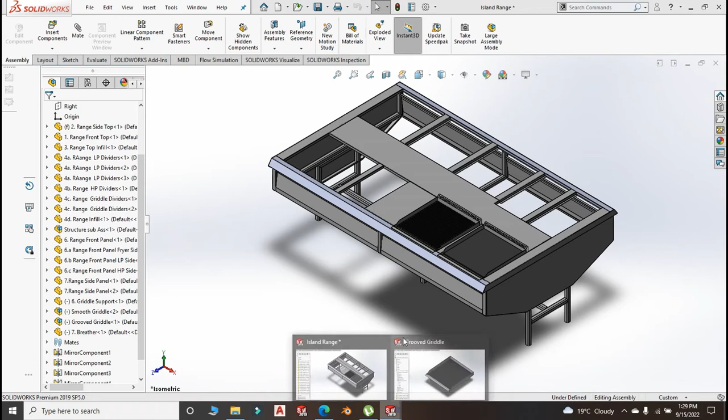Okay, so let us open the grooved griddle. I have it, I think. Yeah, here it is. The burners will be right around here. You will see about it when we start our assembly.

Okay, so without much ado, I will close the range, because I don't need it. Right now, what I will be needing is the griddle. And remember, this griddle, they are of the same size.

Let us remind ourselves the size of the griddle. I think it's about 500 or 499. Yeah, that is 500 by, I think from there to here should be 464. So we are going to make a burner, the length of the burner will be 400.

So you can go to new file and do a new part. Just for a reminder, my custom units are mmgs and everything else. So I will go to the front plane and create new sketch.

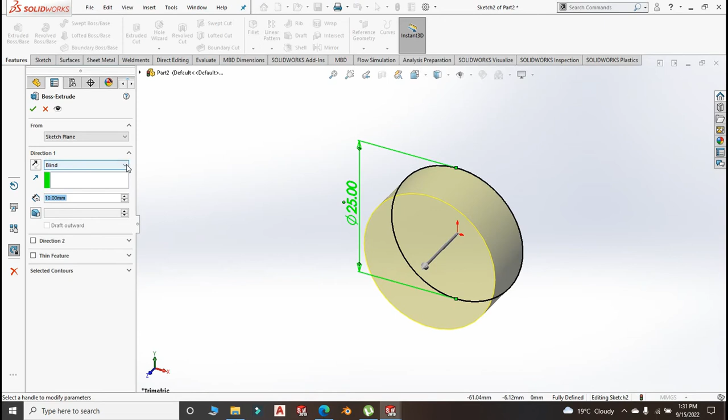I will do a circle from the origin, and the burner will be of dia 25 tube, and like we have said, the length will be 400. So extrude, and extrude it from the mid plane. Length is 400. That's okay.

Now this is a tube, so we will make it hollow, then we will close it. You have to put some end caps there and do full welding, don't want your gas to escape. Thickness is 1.2 millimeter. That's okay.

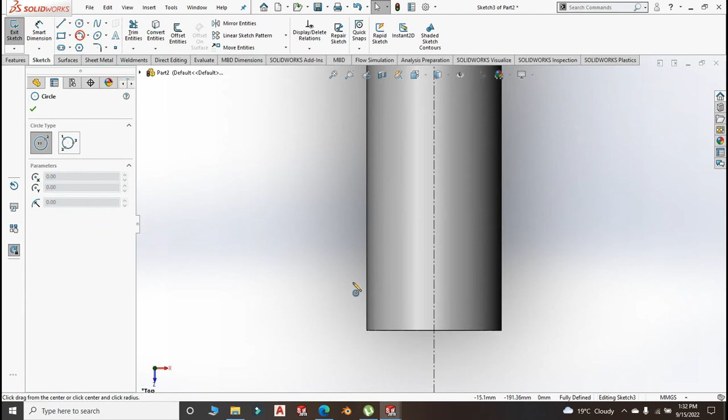Now there we go. Now let us do the holes for the burner. So I chose top plane and started a new sketch. In the new sketch, I do center line from the origin. This will assist us in mirroring our holes. We do a circle.

The diameter of the hole should be as small as possible, so that you need pressure. Remember, these burners are supposed to be high pressure, and this should be 5 millimeter, and from this edge to this should be 5 millimeter. I think that's okay.

Then if I could select this and mirror about the center line. Yeah, I feel like that's okay.

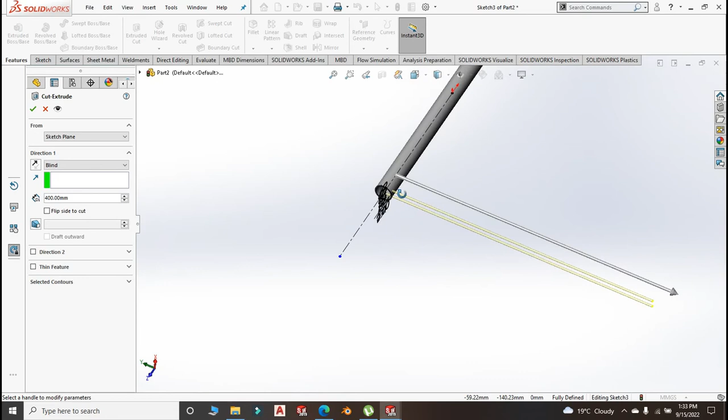Then we go to feature, extruded cut, in the opposite direction. You need to just go up to - is it surface or through hole? Yeah, through all. Through all will do.

Let us look at the orientation. We go to the top plane. Yes, this is okay. You don't want the holes to be - how do I put it - the holes are okay. I don't have the right English to explain that.

Now, if you could go and choose linear pattern and choose the face, and what to be patterned is the extrude cut holes, and you want them to go all the way up to the end of the tube. Yes, those are 40 holes. That's good. That's how your burner will be looking like.

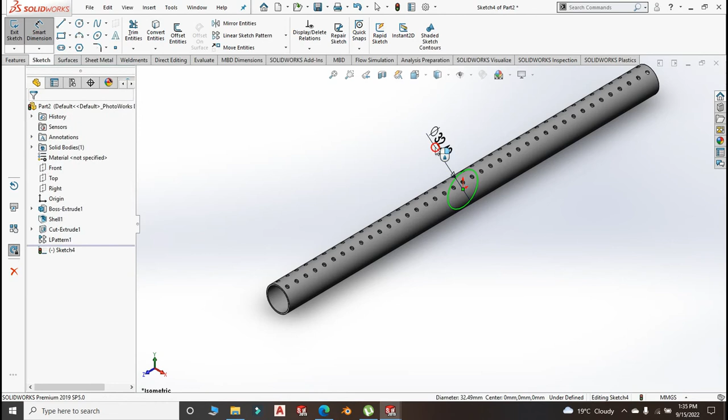This would be like the inlet of this side of the burner, and extrude cut in the opposite direction, you cut through all. Yeah, there you are, you have your hole.

Now if I choose this face here and start a new sketch, then I convert entity. I choose the outer line there, the outer edge, and then I extrude around 1.5 millimeter.

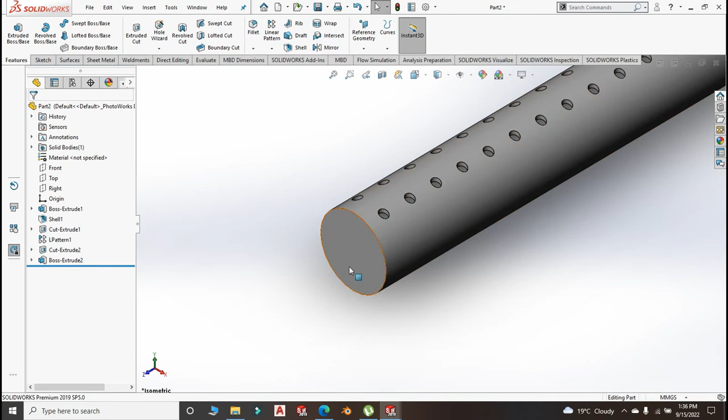Yeah, that's just a cap that we will do full welding, because you need - today my SolidWorks is thinking too much - the gas is supposed to be exiting from the holes only. So this one, you close here and do full welding, no leakage.

So go to front plane and choose mirror, and what you're supposed to mirror is that new extrude boss, so that the other side may also be closed.

Okay, that is good. Now, before I finish with this, let me go to top plane and start a new sketch and hit normal. What I want to do is create a bracket that will be for mounting the burner to the griddle. I choose this line and this edge and make them collinear.

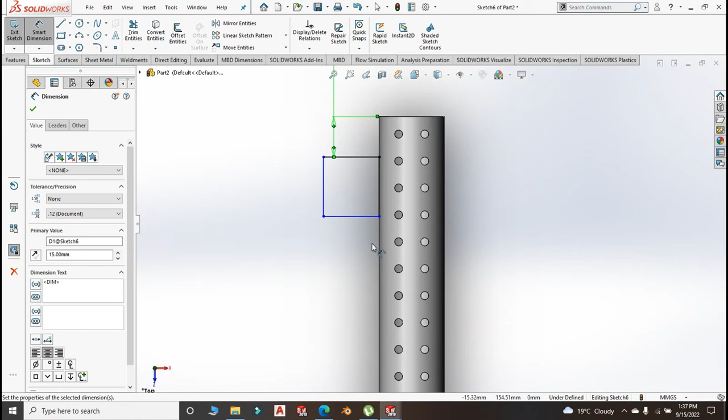Then I smart dimension from here to the outer edge. You can make it 15 or 10 millimeter. There's no harm, just don't take it very far, don't take it too much to the edge. You can do 25, yes, 25 I think will be good. And the size here, you can make it a plate of 30 by 30.

I think that plate is okay. Now create a circle, and this should be, because we are going to use roofing bolt M10, so you can create a bolt hole of 11 millimeter and it should be at the center of the plate. This should be 15 mil, and from here to here should be 15. That's about that.

Now let us mirror that to the other side. Create center line. Well, you can finish with that, or you can mirror it at this point. So choose all that and mirror about the center line. There you go.

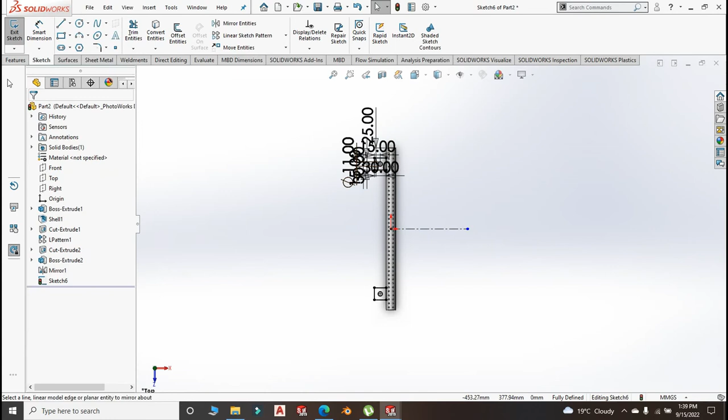Then go to feature and extrude. Here extrude through the mid plane and make it, use a plate of 3mm. 3mm would be good. That's good. That's how our burner is starting to take shape.

That's okay. Now remember, this will be an H burner, so we want to create this part that will be joining the long burners. Okay, so let us go to new part.

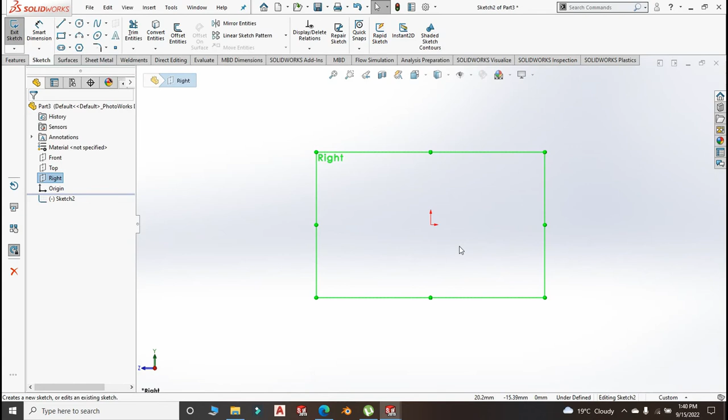Then we go for the right plane. Don't know what is not happening, this thing of mine keeps misbehaving. So create a circle at the center, same dimension, that is 25mm.

And between this and this should be, let us first make these circles concentric. Looks like I didn't choose the center when I was doing the other one. I didn't choose the origin, but now they are good. This is 1.2.

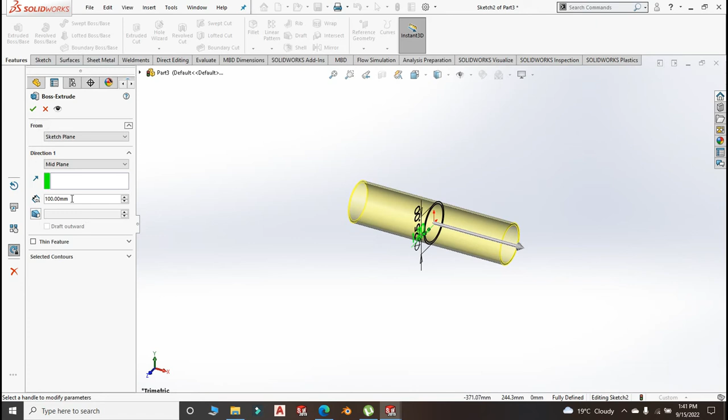Yes, that's okay. I keep telling you there are different ways of doing the same thing. Like the first one, I extruded blind and I did some shelling. This time round I have just decided to make a pipe out of it. The size is 100mm. I hope you have seen that.

Don't get carried away by my too much talking. Go for the front plane and start a new sketch. Make it normal. We want to notch this pipe. I hope you know how, when you intend to join pipes, how to do the notching. Okay, so actually we can do both sides instead of mirroring. That should be okay. See, they are from the center of the tube.

Then extrude and cut, cut through both. That's our pipe, it has been notched. So when we will join it to the other pipe, it will fit correctly and the welding will be good.

There will be no leakage. Go to the top and create a new sketch. Did we choose new sketch? Top sketch. What's not happening here? Top plane, new sketch. Yeah, we are at new sketch. Make it normal. Here you want to create the holes.

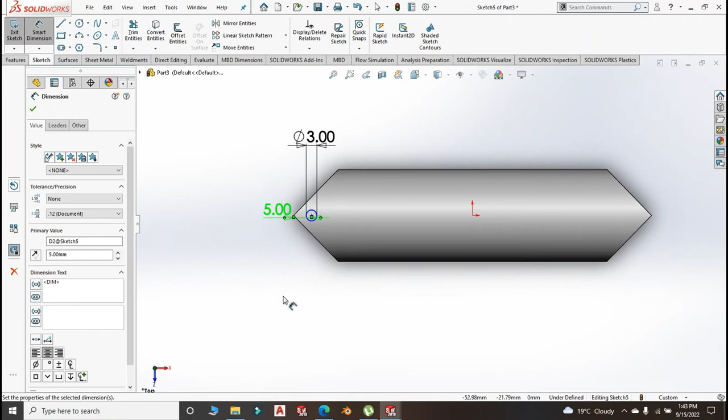Same size, 3mm, and from here to here you can make it 5mm. Yeah, that's okay. Then choose the center and the origin, make them have a horizontal relationship.

I don't know what's going on with my... I think it's the mouse. Extrude the cut and cut just one side, the opposite, at the top there.

That's good. Then you linear pattern, choose that face to be patterned. Should be that hole that you've made there, and this should be about 10 of them, but I think actually you can do 5.

You don't need to do that spacing. This spacing is, yeah, 20 mil is good. The purpose of this is to spread the fire from one burner to the other one. Is that correct English? I think that should be it.

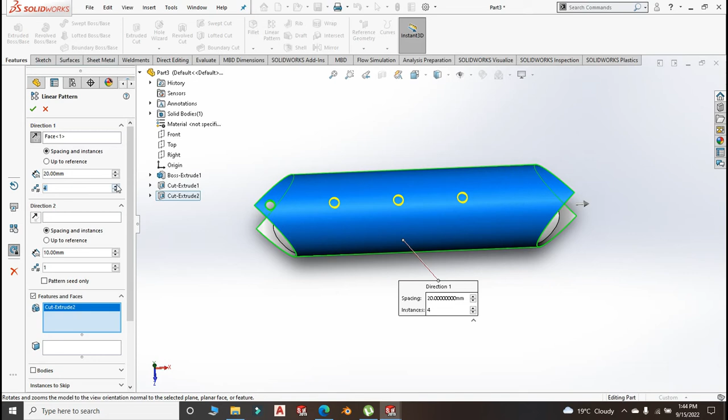You don't put so many holes here, you just need a few. So 5 holes are good. That's okay.

Now go back to top plane again and start a new sketch. From the origin, create a circle, diameter 10 millimeter, just like the other one. This is 10 mil, and extrude a cut on the lower part.

Feature, extruded cut, yes, like that. That's good. The hole is there. The hole is there. So this is good.

Go ahead and save it as short burner tube. Part number 2, short burner tube. You don't have to write tube. Anyway, you know better. Go to new file and create part.

Yes, we need to do what? To go for the right plane and create sketch. New sketch. It's not coming. Right sketch. Good. Now select line from the origin there, like this, like this. Okay, smart dimension, make this 30 or 35.

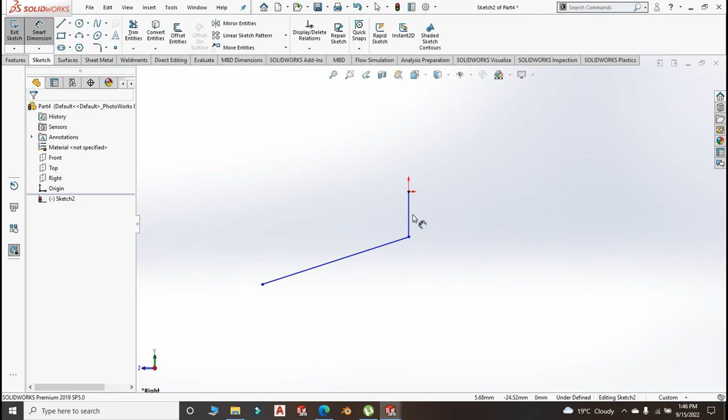35, and this make it 250. The degree here can make it right around 100 degrees. That is okay. Now fillet this and fillet it to 12.5. Actually this should be more of an elbow, or if you have a tube and you can bend it with these parameters, then you are good.

Sketch 1, exit sketch. How do I exit sketch?

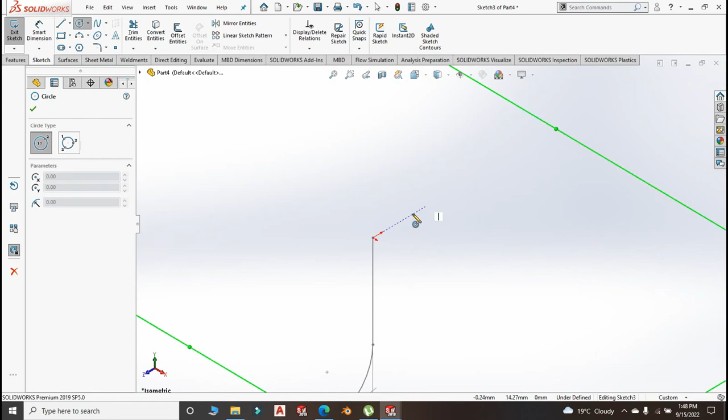Create a circle, the center that is from the origin, and the diameter of the circle is 25, because we want to sweep this on the first sketch.

Still, it's not giving me the option of exiting. What happened to that menu of exiting sketch?

I don't know. Feature, go to sweep, and the sweep profile is sketch number 2, and the circular profile, there you go. Yes, now we have our burner.

Come in, shell this 1.2 millimeter, and choose this face and choose this face because you want it very hollow. There you go.

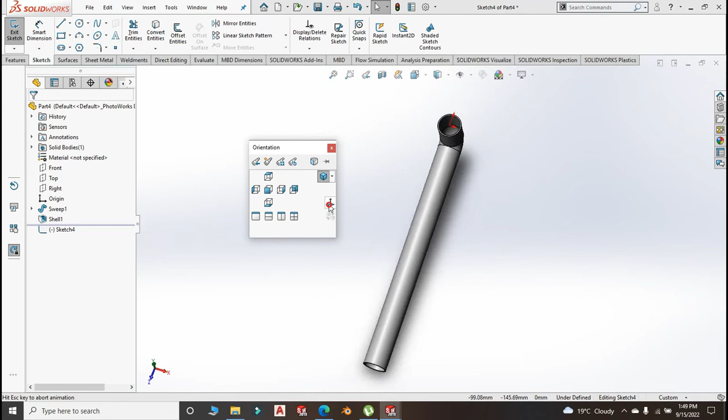Now go to top plane and start a new sketch. Yes, make it normal. We want to create a rectangle,

A slot here, like that, for the purposes of setting the aeration gap. What am I saying? Am I making any sense? We are trying to dimension from here to here.

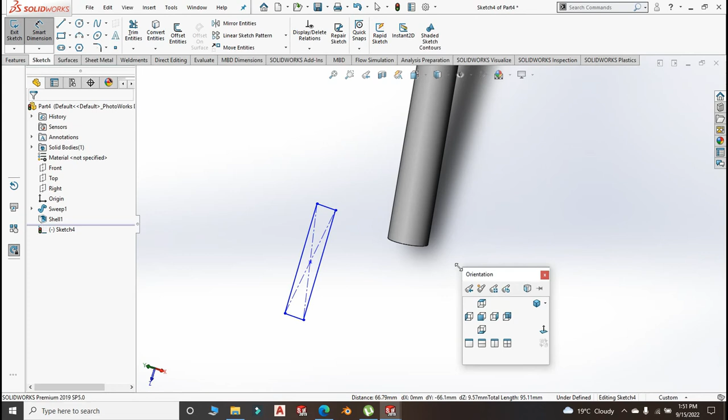I want to start smart dimension from... okay, let me create a center line.

Fine, that relationship is good, so I want to smart dimension from this to this. Make it 20 mil is good.

And you shouldn't have done that, eh? Yeah, that's good. Then this, I'll make it 12.5. Let's see. Yeah, that's what I wanted.

Now I will go to feature and extruded cut, and this I will choose up to next. Yes, because I just want to cut that one. Before I do that, let me continue with the sketch first and create

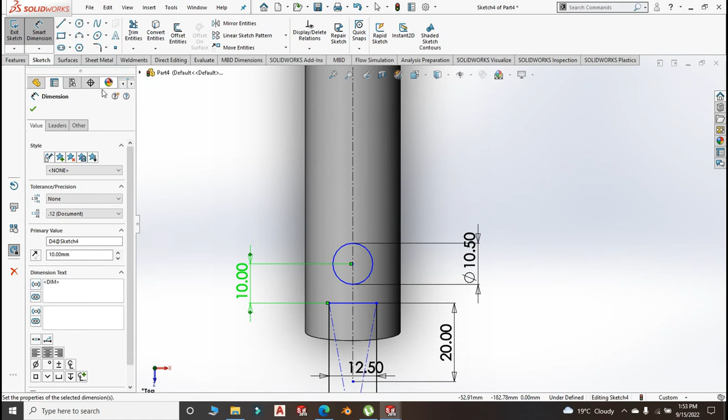From the center of the circle, it can be around 10 millimeter. This is for the bolt that will be for the adjusting that. And how do I explain these things? You hold on, you're going to see.

Up to next, or up to surface. Is it up to surface or up to next? Up to next. Yes, that's good. Our burner is taking shape.

So this part, okay, we go to right plane again and create new sketch. Normal, create a circle. We want to notch also this part. That's about that. Extrude a cut through both. Click OK.

Go ahead and save this part as part number 3. Sorry, 3. I don't know. We will call it what? We'll call it the inclined tube.

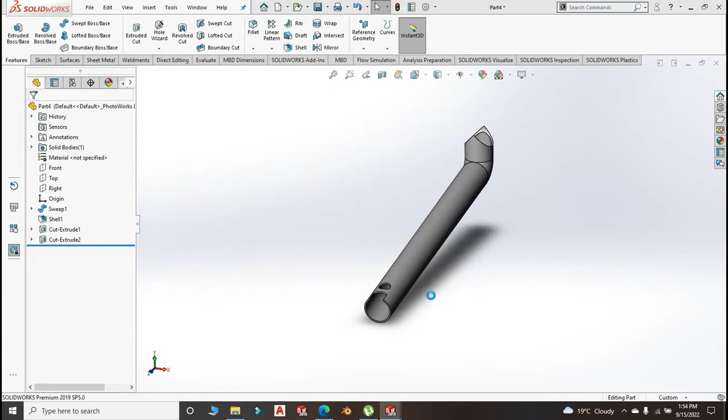Now we need to create a small piece of tube that will go inside this tube. That tube is the one which will be controlling this gap for the purposes of aeration.

You remember the cooking gas, what is the name of this liquid, you know, cooking gas? What do you normally call it? The LPG gas, right? Yeah, the LPG gas has, for combustion purposes, it has to mix with oxygen, right? But you have to control the oxygen for the purposes of having the best flame.

This, just like we were doing it in our O level secondary school, or I don't know how you call it there, wherever you are watching from. The Bunsen burner. The first lesson we learned in our lab was about the Bunsen burner and how to ensure you are having the correct flame, the bluish flame. And there was a hole there, where you were adjusting, you know, the aeration. That is the same case here.

So let us create another part here, just a small tube of dia 20. Remember, this is dia 25. This will be dia 20.

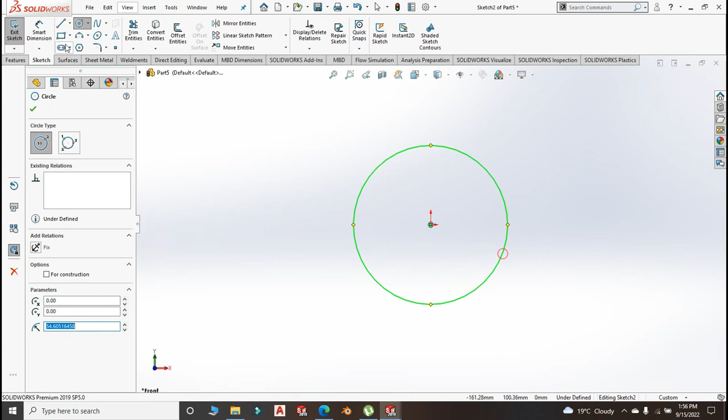Extrude mid plane, the size of it should be 20 or even 30. You can do that, even 15, there is no harm, right? You don't want it to be too long or too short.

Shell this 1.2 millimeter through hole. Yes, you know, this is not for blocking the gas, it is for the purposes of regulating the air.

Reference geometry here, and I create plane, and this plane it should be 10 millimeter on from the origin. Then from that plane I'll create new sketch.

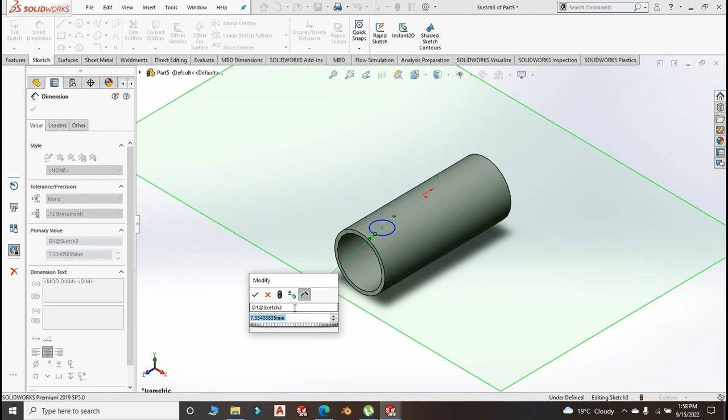All I want to do is create a small handle and a stopper for the tube, so that it might not be getting lost in there in that tube. And you know, you can weld a small rod of 8 millimeter and very close to the edge, to the outer edge.

Like this. They are saying it's 6mm. You can do it like 2mm from the edge. It shouldn't be 2 because the dia of this thing is 8mm. 8 plus 2, so 10 will be good.

Is it? What is the diameter? 8. 2mm is good. So extrude feature.

And the size should not be too big, like 30. Just for the purposes of having a handle. Even 20 would be good. Yes, like that.

Hide this. Save this part as part number 4. Now what are we going to call it? We are going to call it... Dia 20 tube, I have lacked a better name. You will see it when we start doing our assembly. Now at this point we are going to create jet.

Back. Is it jet, flare nut, jet, and something like that? I wish I could just watch.

So we create new part. Okay, and the first thing here we will create is the front plane. Start a new sketch there.

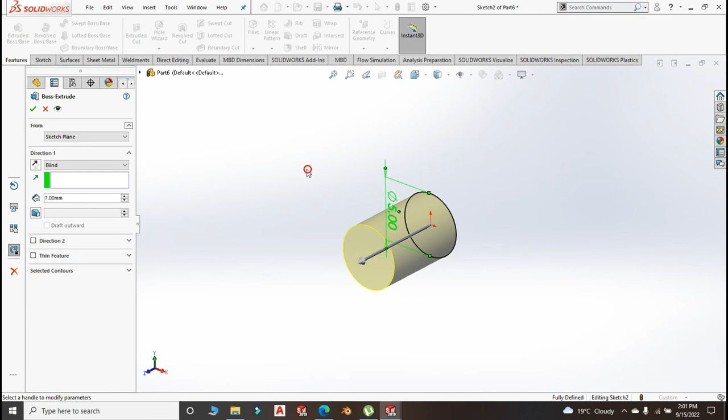Create a circle of diameter, this should be a solid of 5mm dia. Extrude, feature extrude, one direction. This is about 7mm, to create that nozzle. And jet, select this face.

Okay, this is something that you can buy, they are imported, right? I just want to show a representation of how it looks like, so you don't have to worry about it. It's just a representation, it might not be very accurate. This can be of dia 8mm, 7mm is okay, it's just a representation, so let it not worry you very much.

And this can be 4mm. Yeah, from there we create new sketch.

Normal. Choose the polygon, origin. That's okay. This, make it vertical. Choose this to this, make it 12, and extrude by 5mm.

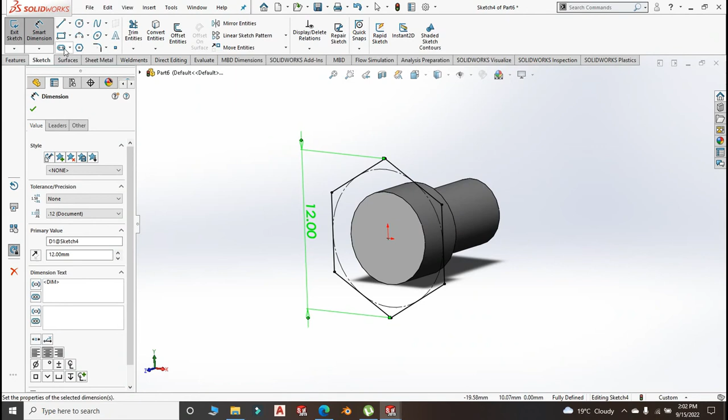It's also good for your practice, and for those guys who are very new, 4mm is still okay. In SolidWorks, it's good when you are doing some of these things for practice purposes.

Now I want to create a very small pinhole. Do you call it a pinhole? A small hole, because you need the gas to be at high pressure, and you need a very tiny hole like this. It might look big from the sketch, but a 3mm hole is very small. So extrude cut, and cut through all.

And remember, this part is very airtight, it should have no leakage whatsoever. So I'm going to select this face and create the washer nut that will be welded to the tube. Our tube is diameter 25, so this can be 35 millimeter, 35 millimeter.

That mil would be good. 30 mil, and extrude it. This 2 millimeter is okay.

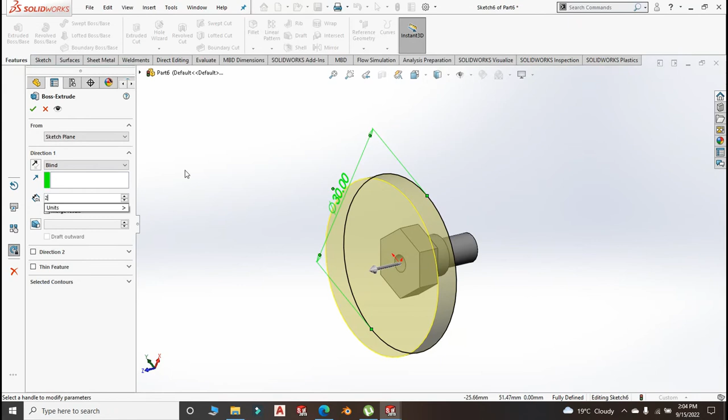Then select this face, start new sketch, another back nut, select polygon from the origin. That's okay. Create normal, make this horizontal, is it horizontal or vertical? Then choose from here to here, you make it 12 millimeter again.

Yeah, I think it's same size as the other one, and extrude these 3 millimeter. Is it 3 or 4? 5. Yeah.

The purpose of this is because here now we have the female, is it the female or the male part of the flare nut? So here we create circle.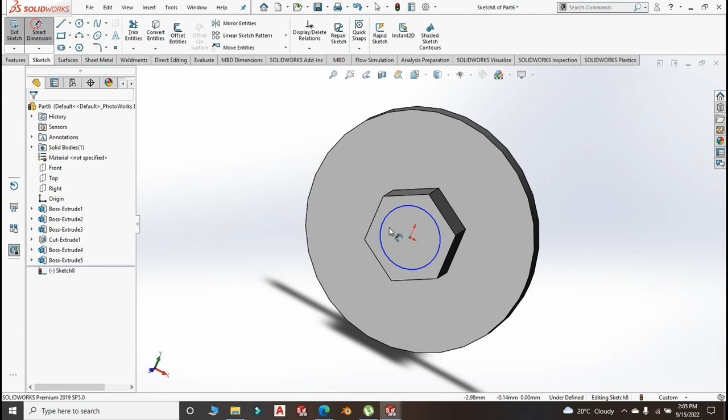The diameter of this circle should be around 8 millimeter. Then we extrude it 10 mil. That's okay.

Create a chamfer. This should be 2 millimeter and 45 degree. You choose this edge. That's okay.

Now remember our pinhole is going up to the washer, so we create a circle from the washer, and well, I don't know, you can make this a little bit bigger, there is no problem. Big is like 5 millimeter.

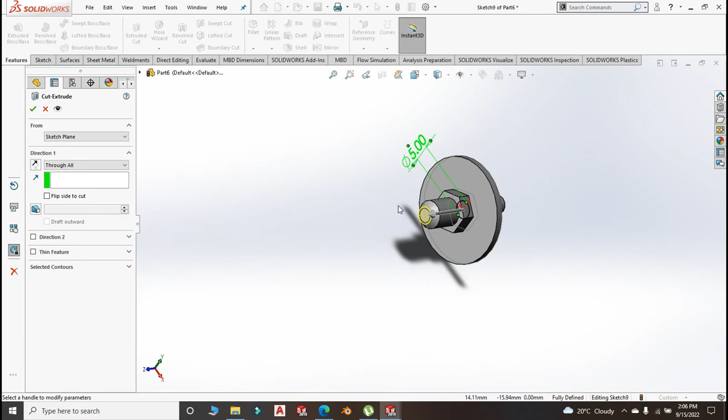Then extrude the cut through hole. I don't know, that diameter is big. No, it's good. Yeah, so our hole is going through.

Now I don't know whether the others I was choosing material. This is always copper, metal, copper. What kind of copper? Polished copper, brushed copper. Yeah, it's always copper.

Now go to hole wizard. Where is hole wizard? And choose thread, and your thread will be starting from here.

Yes, if you want to offset, you can offset by 1 millimeter. No, don't offset. And your hole up to here, and it's metric die. Is it metric die or metric tap? Metric die, and you choose M10 by 1 or M10 by 1.5.

I don't know about threads very much. Like I was telling you, these are things that I don't worry about myself. Yeah, I should have offset the other one so it may have a better finish. Can I offset it by 5? Yes.

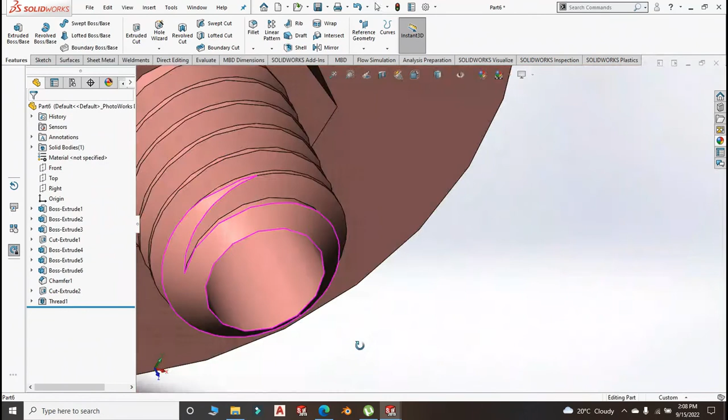Yes, see, the threads are good. The threads are better there. So for the purposes of making it better, I choose this face, start a new sketch, then convert entities and choose the face. Has the entity been converted? I hope so. Then extrude.

Yes. And this I will cut through all. And the end of the thread will be good. So this part is the one which you normally connect to the flare nuts and all that. The gas people know better.

So that is that. Save it as nozzle and jet, part number 5. Nozzle and jet.

Yes, can we start our assembly and see how our burner will look like? File a new assembly. Click OK. And the first part is burner. Actually, can we bring everything, because we will be requiring everything apart from the griddle.

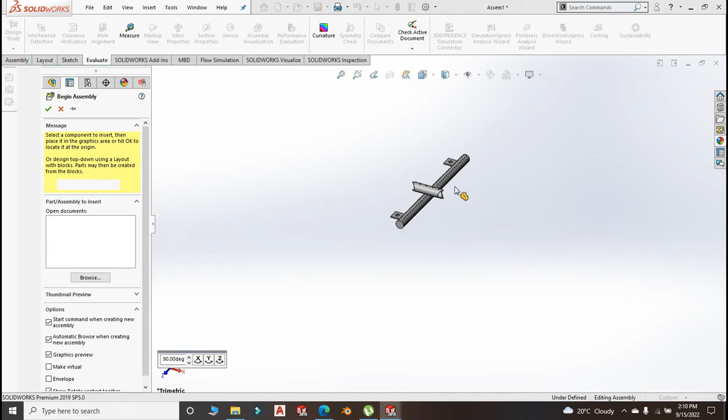Yeah, so that is 1, 2, 3, 4, 5. Okay.

Now we want to do our assembly, and unfortunately I will be having the same issues I was having last time. If I choose that plane and this plane for the short one and make them coincident, then I will choose mate again. I will choose this, make it tangent to this.

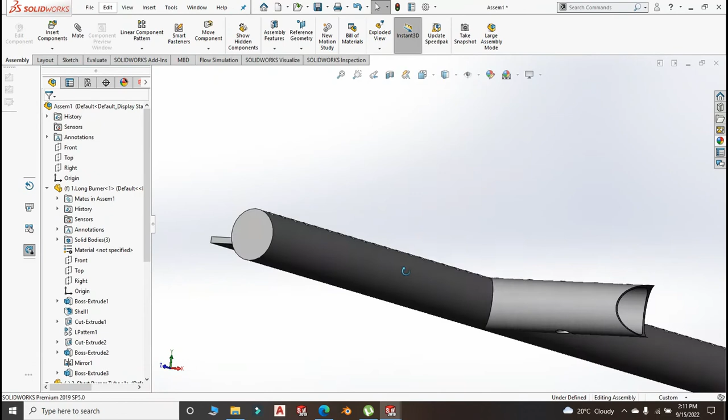Okay, now see here, you will do your full welding. Remember the hole that is there, like I was telling you, gas will be coming from the pinhole here, through this tube, through this hole, then it can go to this side or the other side. When we mirror this, we will see. Yeah, so that is that.

Now I'll choose again to mate, and I will take which plane? Yes, this right plane, and I will choose the inclined tube right plane. Yes, then I will mate again. I don't know whether this will work. Tangent this and this.

When I choose top plane and mate with the top plane of the inclined tube. No. That I shouldn't have done.

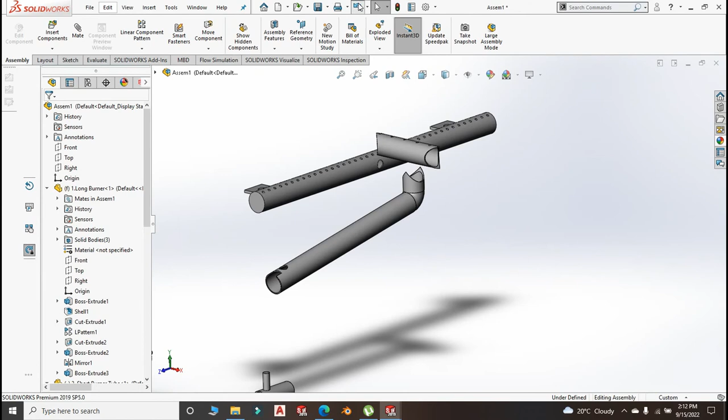Before I go to that, let me choose this top plane of the long burner. Yes, and to make them coincident, I mate with...

Is this floating or fixed? It is fixed. So I don't know. Yeah, now looks like it is good. It is fixed, it is not moving.

Let me see if I mate the top plane and this other top plane also, whether it will do me right. That top plane and top plane of this, it's not coming. So there is something I need to delete there or edit, and go to the mates and edit something.

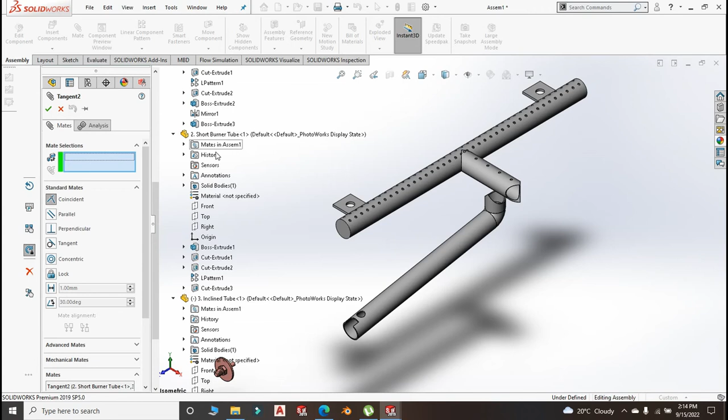And make coincident. Therefore I take this top plane and the top plane of this. Yeah, now that is better. Then I will choose not the right plane but the front plane and mate it to the front plane of the small burner. That is front plane of inclined, front plane of the small burner. Yes. Now the burner is looking good.

There is where you're doing your welding and all that. Now I will take this insert, not mate, and make these two concentric, this and this. Concentric relationship. Like I was telling you, this tube...

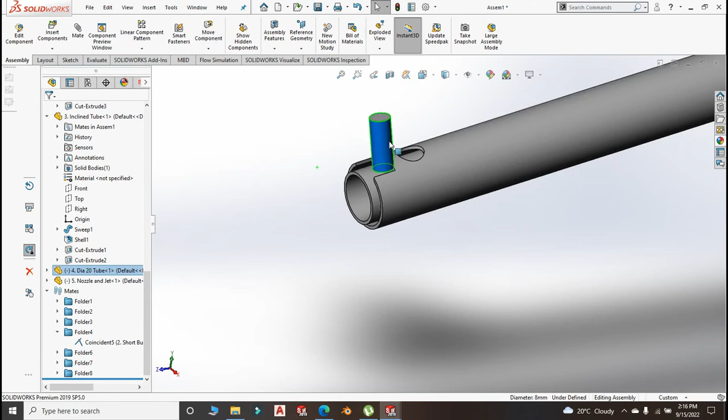We are going to edit this. You want... okay, let me open this and add. I think I don't need this extruded boss. It is not necessary, so let us delete. Follow also the sketch and delete.

Well, these people, they normally know how to do it, you know. Assembly, sub-assembly.

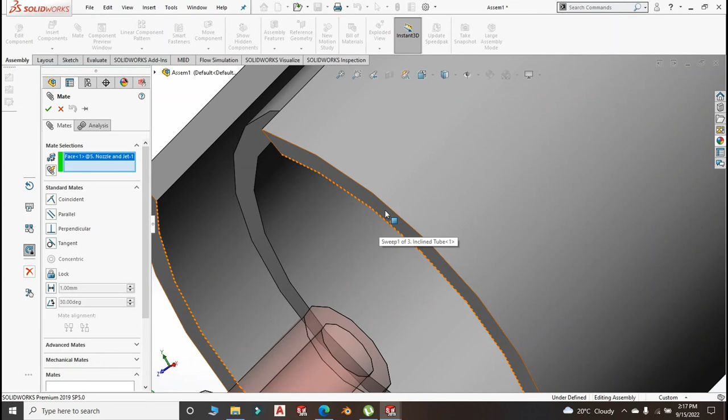Yeah, like I was saying, this tube goes in there, and that is what you use to regulate this hole here, the kind of amount of oxygen that you will be allowing to mix with the combustion, the cooking gas. Now we mate this to make them concentric relationship, this concentric to this. That's good. Then you mate it again, and of course this face will be welded, tack welded to this face here. That's good.

Now what will you see if this tube touches the washer, the amount of oxygen that will be going inside the tube is very small when you look at the space that is here. So what I was saying is, you adjust it, you open this opening or close it depending on the flame.

This is normally done as your burner is on, observe how the flame is behaving. And if you're satisfied, there is a bolt, you weld a nut on this hole and a bolt, so you tighten the bolt which tightens this inner tube in its place.

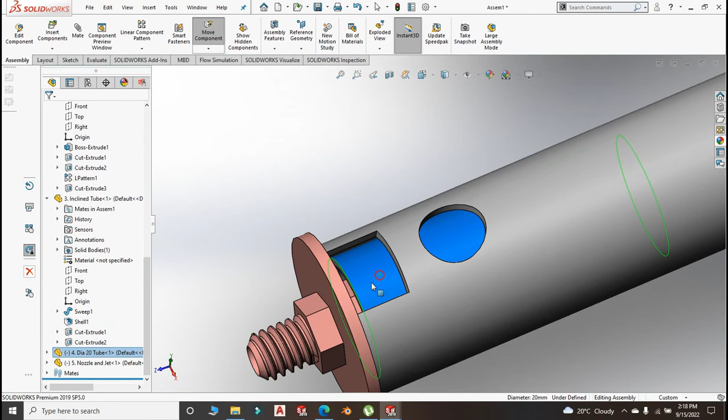We've done some little observation of how they do their gases, their gas fittings.

I'm going for the inclined tube and choosing the right plane, and I will mirror components. Is there anything else that I have not inserted? I think we are good, and the component to be mirrored is this long burner.

No, it shouldn't be like that. It should be like that, but no, I don't like that, because now the holes are on the other side. I don't know why it flipped. It shouldn't have flipped. Now they will be forcing me to insert another burner. Oh man, long burner.

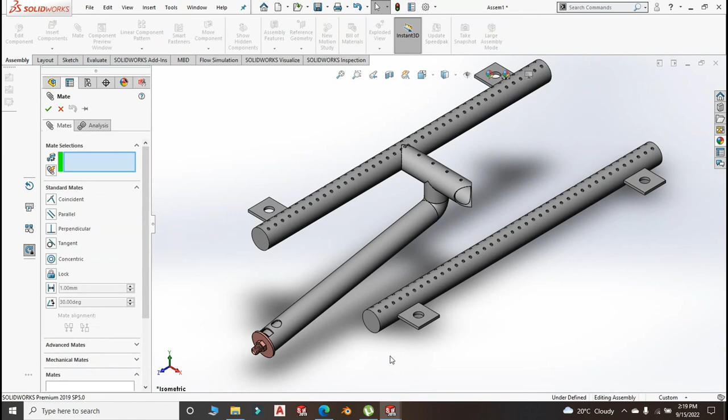Then what do I do? I rotate it, okay. No worry, mate. We are going to take this and this. They're flush? Yes. Then again mate, this and this. Alright. Then I don't know, mate.

Now this will give us some trouble. Tangent. This to this. Perfect. Yes. Our burner should look like that. Our H burner should look like that.

And like I was telling you, we will require two. Do I need to do a bolt and nut? There, yes. Let us do a very quick bolt and nut. Now save this as burner. Griddle burner. That's so cool.

Go to file, new, and we create part. Click OK. Go to the top. Start a new sketch from the top plane. Center. No, I should choose the polygon.

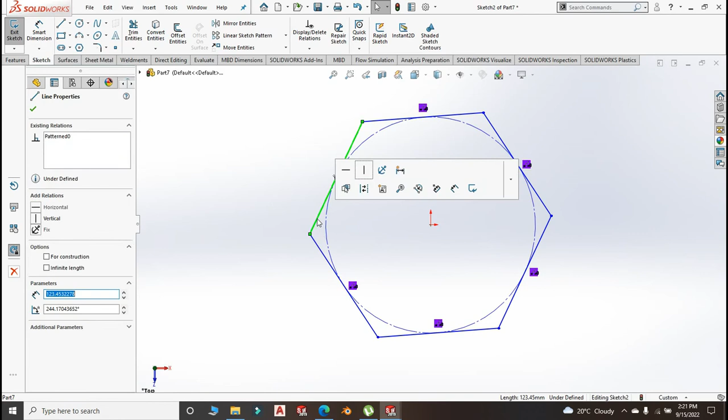We are doing the bolt, then we'll do the nut. Make it vertical. The diameter from here to here, we are using a bolt of 10, so this should be 14, right? I don't have a bolt here that I can take the actual measurements from, like I was telling you, I just want to know how to draw it and do some correct representation.

Otherwise, we later will be doing bolts and nuts, the actual drawing of a bolt and a nut. No, the extruded boss, we edit and make it in the mid plane. Yeah, mid plane. Yeah, that's good.

And we choose this face here and start a new sketch, circle from the origin, and we select the circle and this edge here and make it a tangent relationship. Then we will extrude cut, and here we will choose flip side to cut, degree of 45, and end condition will keep through all, right? I think that is okay.

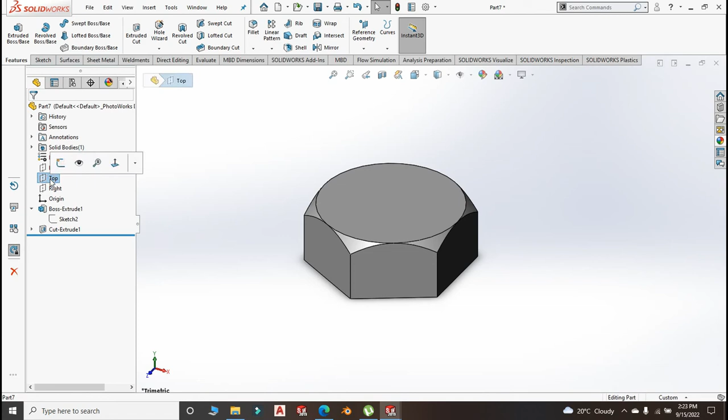Yes. Then we'll choose our top plane. What's going on, I can't see the top plane. And the mirror component, what we are mirroring is that extruded cut. That's good. Yes, our bolt is taking shape, so choose here, new sketch, center circle.

We have said we are using M10, 10 mil. I hope it is in proportion with the bolt head, and this should be 2 inch or one and a half, should be what, 25, 32.5, 25 plus 12.5, that equals to what, 37.5.

Yeah, bolt is there. We go to not fillet but chamfer. I don't know whether we keep the same parameters, 2 and 45 degrees. Yes, that's okay.

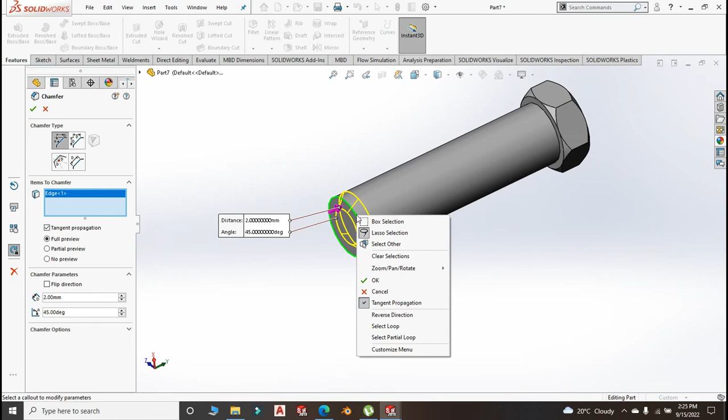Then we go for the hole wizard, choose thread. Our thread starts from here. We can offset it by 2 mil. I don't know, and they are coming up to where, selection up to here. Actually, we can offset it by 5 mil. 3 mil is okay. Metric die M10 by that. That's good.

Will take some little time. Yeah, the thread is good. You need to finish this area, give it a nice finish, create new sketch, and you choose this, convert entities and choose this face, right click, then feature extruded cut through all. That's good.

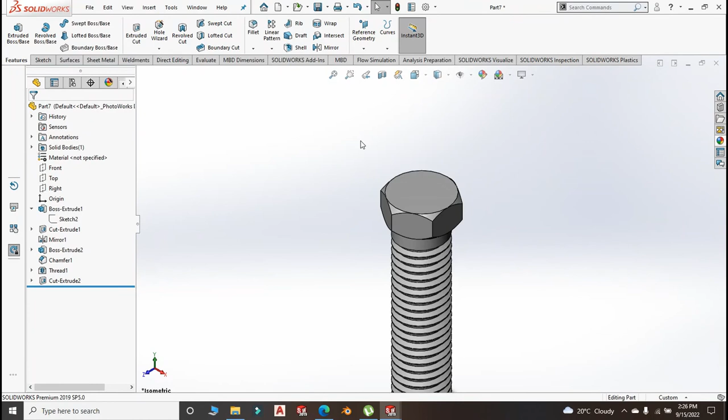Yes, our bolt is good, but I feel like the length of the bolt is not really pleasing, so let me edit this and make it 50 instead.

I feel like the bolt, this feel like it's not enough. That's why we are using the roofing bolt, right? Just because of the height of the burner from the plate, you should have enough room. What am I saying? You should have enough length to adjust the height of the burner to the size that you want.

I know, hold on, we will do our bolt. But number 6, we will do our assembly to the griddle, and we will see. It will make sense of the gibberish that I'm trying to tell you right now.

Do we need a nut and a washer? Nut. Yeah, let us create the nut. I'm not going to create a washer.

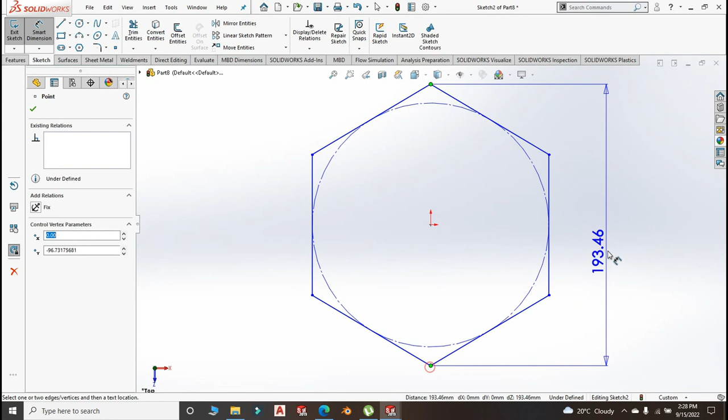Top sketch, new sketch. Not you, but you there. I don't know why I keep making this vertical. This is 14. Yes.

Then we extrude boss. We extrude it on the mid plane. And 5 millimeter - is that the thickness of the nut? Are they always that thick?

Then we create a sketch here, just like we did to the head of the screw of the bolt. Same thing applies here. Make this and this edge tangent, then extrude cut.

Mid plane - through hole, not mid plane, should be through all, flip side to cut, and degree 45.

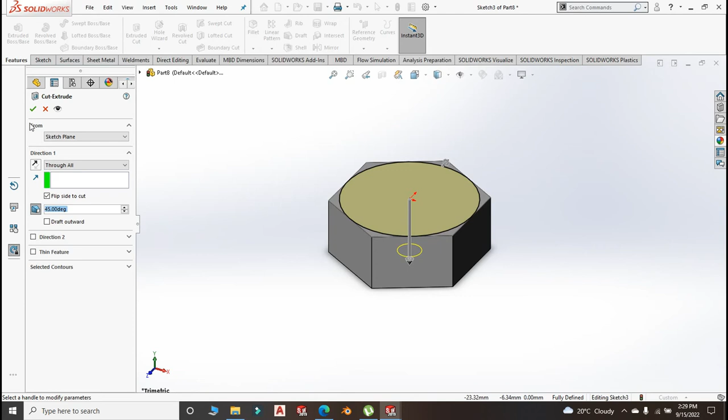Good. Then go to the top plane and do a mirror, not linear pattern, and the component to be mirrored is there. The feature to be mirrored is that.

That's good. Choose the top again, start new sketch, create the hole for the nut, M10. That's what we're looking for. 10.

Extrude cut through all. Hole wizard. Thread.

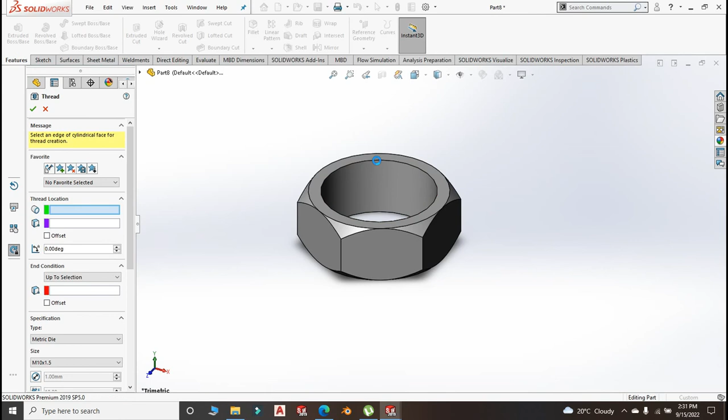From here up to this edge. And this should be metric tap, not metric - metric tap, because do we need to offset it to give it a clean finish?

Yes, we should have offset the threads. Edit feature. Offset, not that one, but offset here. Yeah.

This other side, I don't know whether if we choose this and edit, I'm not sure, because how do we correct this thread? Are we supposed to...

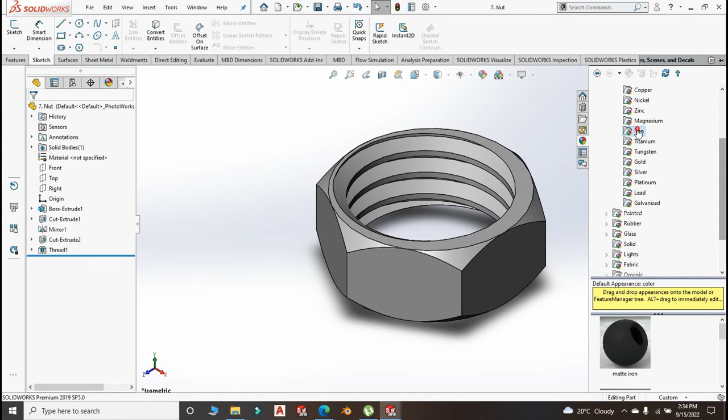Now let me choose material for the nut, and I can choose which nut. I'll choose iron for the purposes of differentiating, you know, when we are doing our assembly.

Actually, I need to add the color. Can I give it an orange color? Yes. I don't think this should worry you very much, because we are just trying to make it look different.

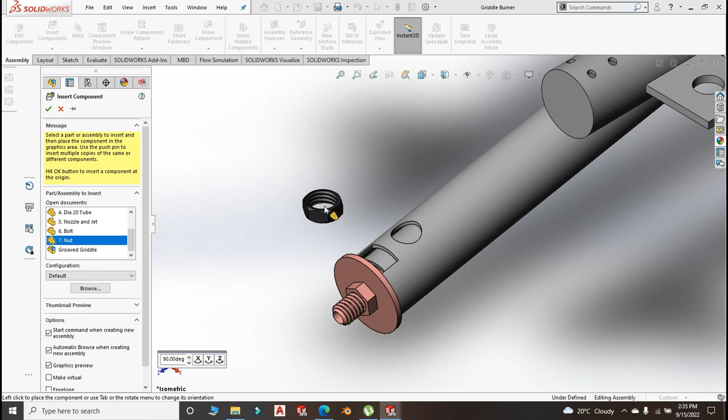Now let me bring up a nut here. Insert nut. And I will make it a concentric relationship with the hole.

Like I was saying, that nut, you weld it permanently there, permanently on the surface of the tube. Okay, it's welded permanently there.

Let us bring in again the bolt. This bolt doesn't have to be this tall, you know, this long. It doesn't have to be this long, okay? You can do a 1 inch bolt, like I was saying. It's just for the purposes of, once you do your adjustment, holding that inner tube in place.

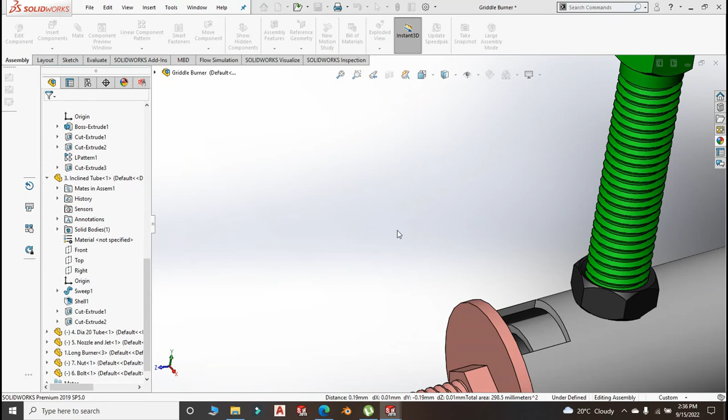We make this concentric relationship. I choose this face, and I choose one of the faces of the... where is my thing? And there you go.

So when you adjust your tube to the right size, to the right opening, you tighten the bolt. But remember, the inner tube, we didn't punch a hole. You don't want any leakage of the gas. We did not punch any hole, right?

Yeah, and also the reason why we did 200 millimeter - actually you might be forced to increase this degree, I don't know. You don't want an open flame near this opening, because there will always be some gas here, and it is always easy for the flame to have an unwanted flame here. That is why this thing is at an angle.

I was telling you, the gibberish that I'm talking will kind of start making sense when we do the assembly. Feel me? So at an angle, you don't want open flame from here getting too close to here. You don't want any fire in your kitchen.

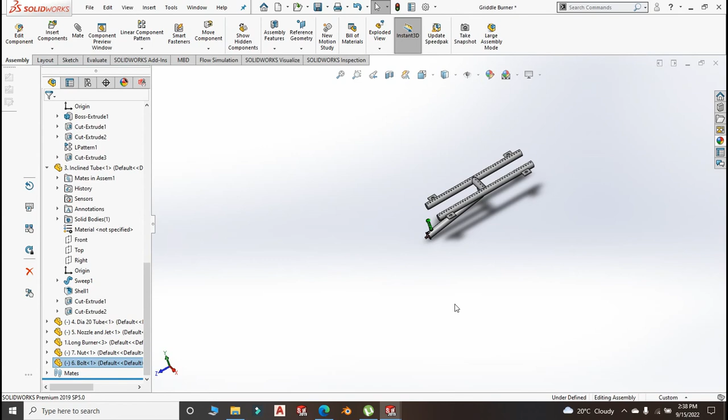Okay, our burner is good. Now we can go ahead and close anything, save documents, rebuild, save. We can go ahead and close what we don't want. We just want to be left with the burner, the griddle, and the bolt and nut.

The incline tube we don't need. This we don't need. Jet we don't need. We need the burner, nut, and yeah.

So we open the griddle and insert component, and the component to be inserted here is the griddle burner. Okay, now having said that, we start our assembly into mate.

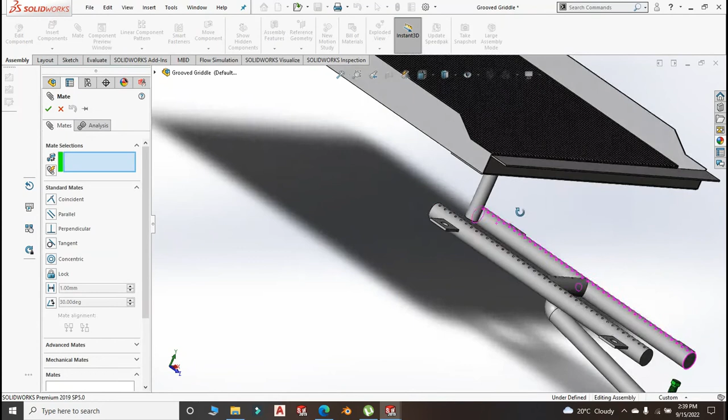We can make this to be a distance of 50 millimeter, something like that, from the edge of this to the outer edge of the griddle. We will see, yeah, 50 millimeter is okay.

Again, you don't want your burner coming so close to the edge such that the flame will be... I'm getting ahead of myself, I will explain that. And this should be 50 millimeter from this. Don't know whether 50 is sufficient to here. Yeah, 50 looks sufficient.

Now leave it at that. Insert component, and the component to insert here is bolt. Bolt is good.

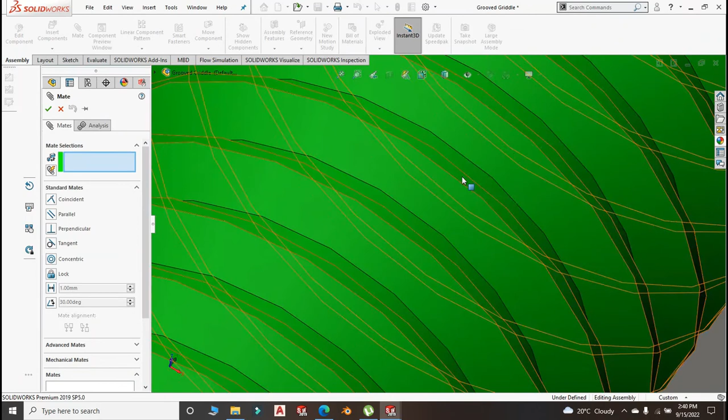Mate the head of the bolt, the one which is welded to the bottom of the plate, the hot plate - that head you weld here. Then continue to mate and make the head of the bolt and the hole concentric. Choose that, and this hole of the plate, make it concentric.

Yes, that's good. Now your burner should, like I was saying, that bolt should be long enough for you to adjust it accordingly - this gap. That bolt is the one which will give you room, because you don't want your burner too close to the plate, and you don't want it very far away from the plate either. That is the work of gas fitters and they know better, but ideally this is how you do it.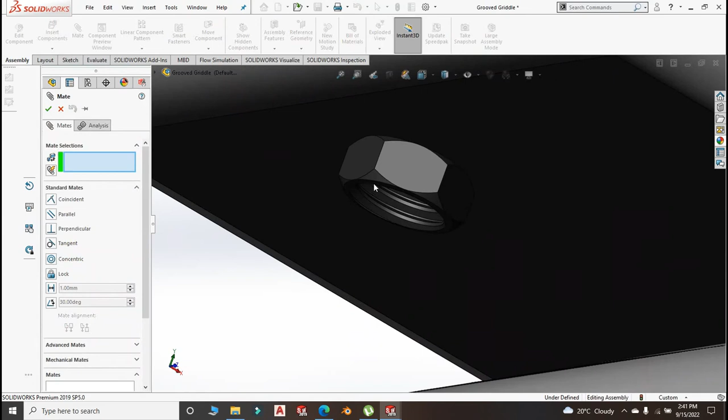Now we insert a nut and we mate it - this face of the nut, because then you do this with two nuts after, and a washer if you want. That face should be on this side of the plate.

Then you choose and make a concentric relationship - concentric, that face, that, and the bolt - such that now I think this should be making sense.

See, now you're okay. Let us first bring in another nut. Insert nut - we could have mirrored this. Mate. Now this face should be on the other side of the bolt, the plate. Then you make it concentric with the bolt again.

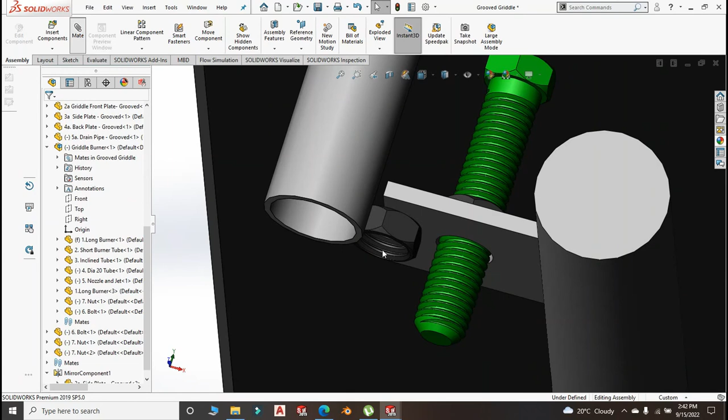Did we choose concentric relationship? No. We need to choose concentric relationship, and that is this and this. You can even choose - yes.

So you see your burner is held in tightly between those nuts, right? So you can adjust it up and down. That is why I was saying this bolt's length has to be sufficient for your flame.

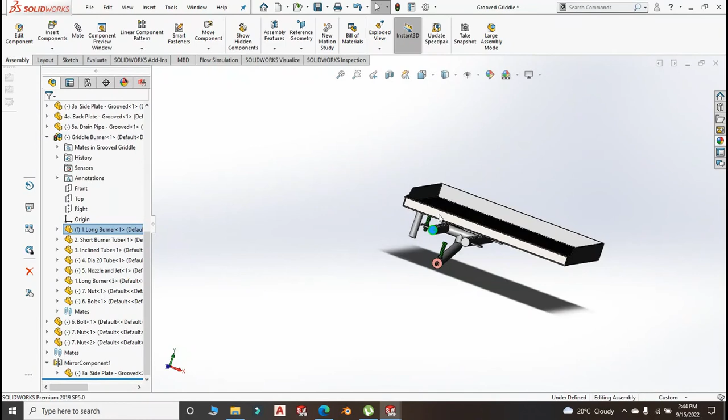The other thing is, you don't want your burner too close to the outer edge of the griddle, because if you bring your griddle close, say this burner's holes were like 30 millimeters apart, if they were very close to the edge, the flame would protrude. You don't want any flame on this edge.

You want flame at the bottom, at the plate, that's what I'm saying. Now, also like I was saying, this bolt doesn't necessarily need to be this tall, this long - street language, man, that's why I'm calling it tall. It doesn't necessarily have to be that long, and you can use a smaller bolt for the purpose.

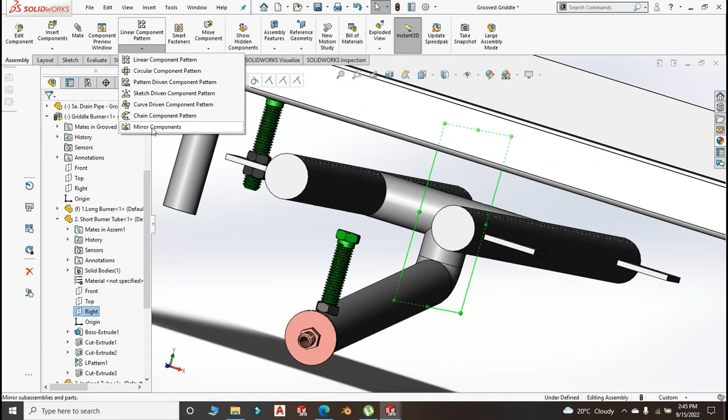I have explained. If you allow me to choose, let me collapse everything and choose and go for this - where is this, the shorter burner. I expand it and choose the right plane and mirror component, and the components to mirror here are bolt, nut and nut. Then click OK.

Then I still could go for - which plane is that? The right, the front plane, and mirror components, and the component to be mirrored here is the last mirror that I have just done. This is it, so I think so.

Yes, see, our burner is perfectly sitting under the plate. Remember, this bolt head is welded to the plate, and since when you're doing your connection, the copper pipes and everything, you just need to tighten a flare nut here.

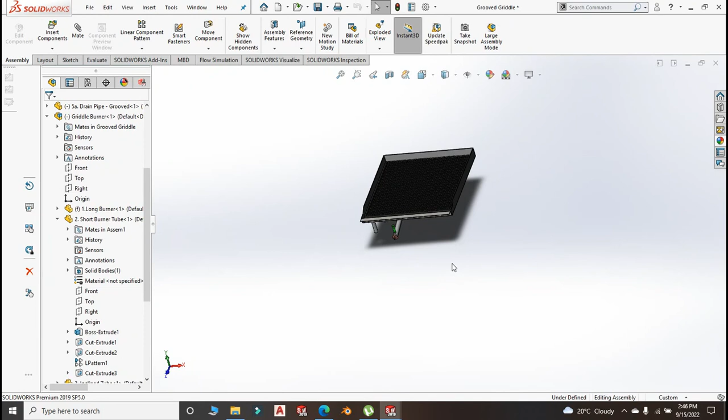And I was saying that your griddle is placed on the cooker, the cooking island, the range. It is not welded, it is not mounted by any bolt or anything. So when you want to do your servicing, you are removing the entire plate together with the burner, then you do your servicing and take it back.

And the burner - the beauty of the burner is that you can also remove it by unscrewing this bolt, this nut, leave the bolt intact, remove your burner, do whatever you want to do with your burner, and you are good.

And like we were saying, this plate needs to have two burners. So if I may collapse everything again, and go for the grooved plate and choose the plate - I want to choose the plate. Where is the plate? Here's the plate.

Grooved plate. Then I go for the right plane and mirror component, and the component to be mirrored is this, I don't know. Then the burner - where is the burner?

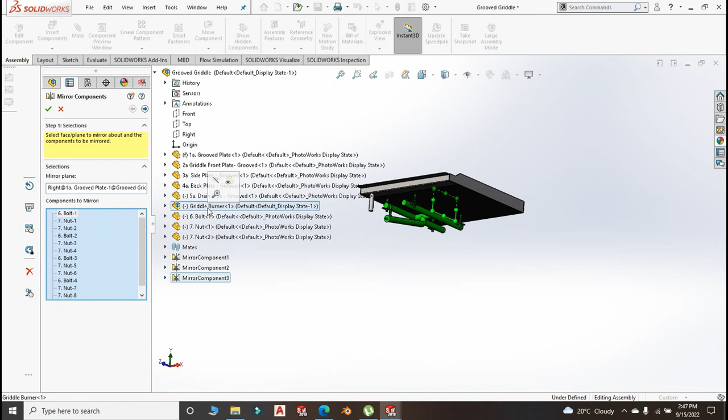Let me collapse that. Griddle burner. Yes, there we are. Our burners are good and very much in place.

The reason why we don't do one big H-shaped burner is that if you do this here, and this, and the outer one here, and probably one at the middle, and then another tube here, the plate will not be getting heated evenly. If you look at this, the burners and the spaces between them are almost equal, so the plate will be heated evenly.

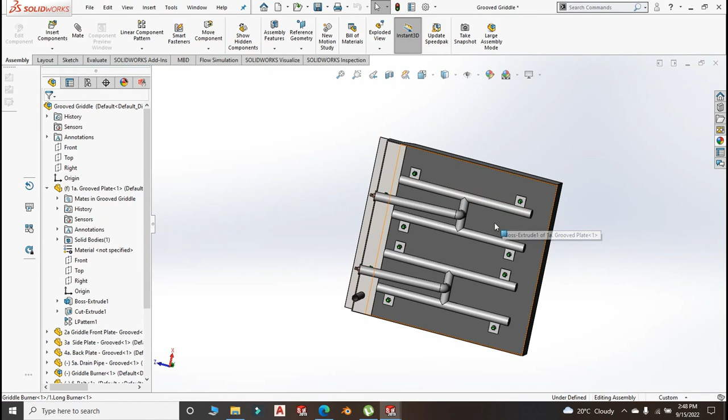There will be an even distribution of heat on the plate, and when you're doing your cooking, like our chefs will tell us, they won't be having issues with, what do we call it, you know, trying to do some barbecue and one area being hotter than another.

I don't know, let me leave that. I'm trying to open the island range, open range, SolidWorks layout, island cooker range. We see.

Now you can't see the burners because they are under there on this plate. That is why I was telling you the burners will be guiding us on doing the openings.

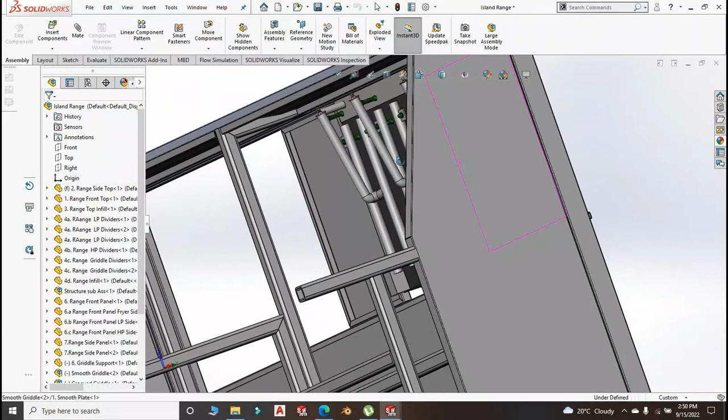No, we don't necessarily need to have the burners in place for us to create openings for the tabs. We will do the openings for the tabs on this plate.

Then we will do a manifold. You need to have a manifold for the connection of the gas on this side, for the connection to this nozzle and jets, and to the gas taps. And you also need to have an opening.

We will do that in our next video. No, in a later video. We will finish with all the components, then we will come to the gas fittings and how they are connected.

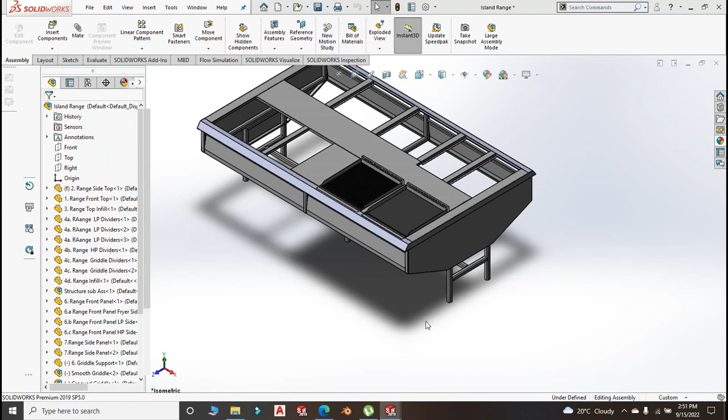Okay, so that's it for today. I hope you have learned something as far as the burners are concerned, and whether you are doing gas fittings yourself or contracting people to do them for you, it is always good to be aware of what normally happens.

There is no evil, there is no harm in having skills and knowledge. I have never seen anybody walking at an angle or limping because they have too much knowledge of things. Knowledge doesn't make anybody tired. Knowledge doesn't hurt.

It is good to know these things, whether you are contracting people to do them for you, or even you can be doing it yourself. And probably you have been facing challenges, or doing it differently from the way I'm doing it, and you want to try something different. Maybe you will get better results than how you have been doing it.

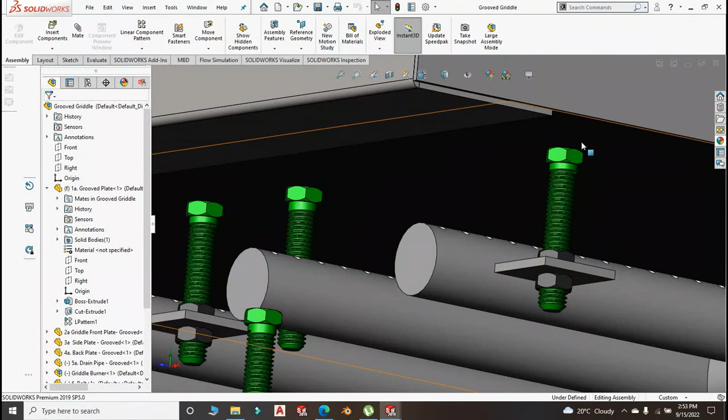But nowadays I'm paying the price, because when I want to do a small welding, like a full welding to this bolt, I gotta get somebody and pay them. Not that the pain, it's no problem, because at the end of the day everybody's got to put food on the plate. The thing is, it is annoying. It's a small thing, you had an opportunity to learn, you ignored it, and now you are paying the price.